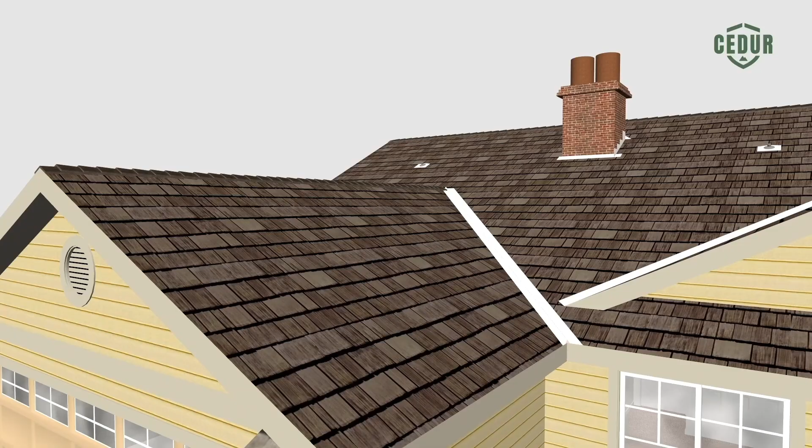Welcome to the CEDUR Synthetic Roofing Products Installation video. In this video, we'll guide you step by step to ensure smooth and professional installation of your CEDUR roof.

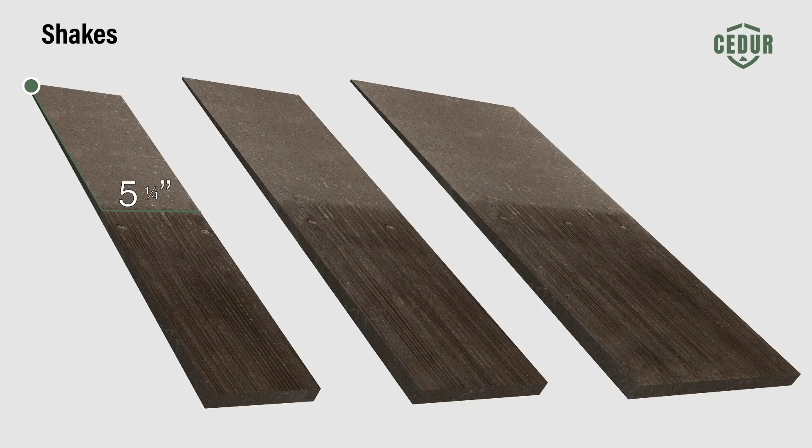Let's get started. CEDUR shakes are manufactured in three widths: 5 1/4 inches, 7 1/4 inches, and 12 1/4 inches. All CEDUR shakes are approximately 23 1/4 inches long. Similar to heavy hand-split natural cedar shakes, CEDUR shakes are 3/4 of an inch thick at the butt end and taper to 1/8 of an inch.

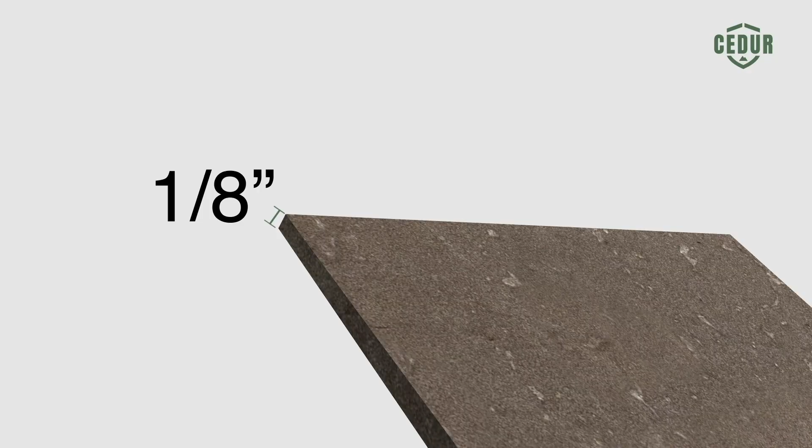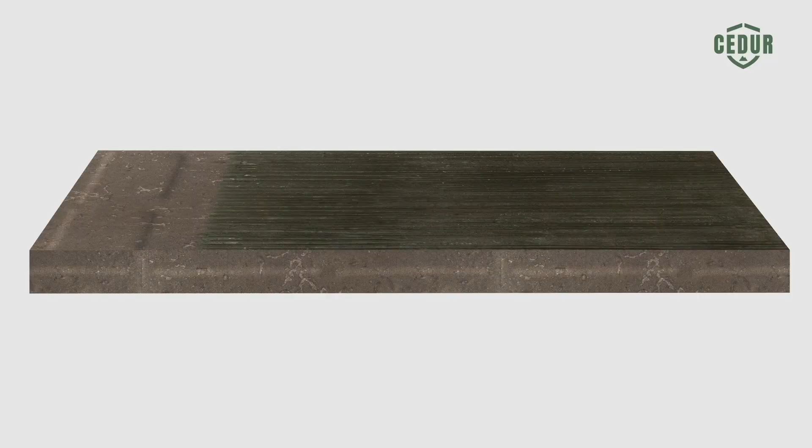CEDUR ridge pieces come in three pitches: low, medium, and high. Ridge pieces are 13 inches long, 3/4 of an inch thick, and cover 10 inches of the roof ridge. CEDUR starter pieces come in one size, measuring 15 inches by 15 inches. They are 3/8 of an inch thick at one end and gradually taper down to 1/8 of an inch at

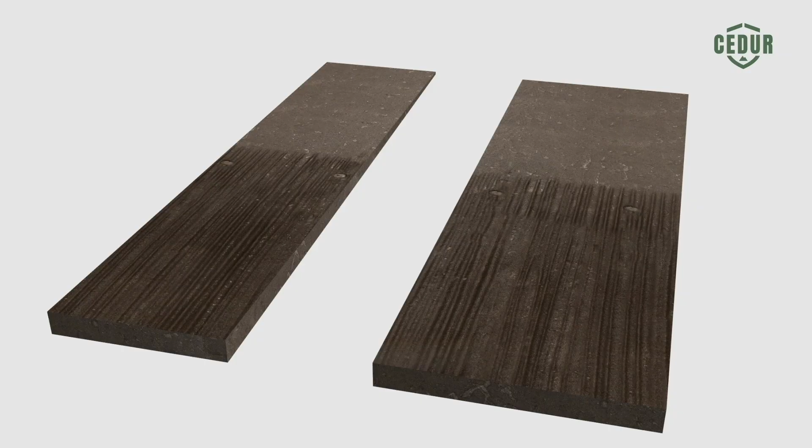the other end. All CEDUR shakes have dimple marks that indicate where fasteners should be placed. The 5 1/4 inch and 7 1/4 inch shakes each have 2 fastener locations, while the 12 1/4 inch shakes have 3 fastener locations. CEDUR starter pieces require 4 fasteners, and CEDUR ridge pieces require 4 fasteners, 2 fasteners per

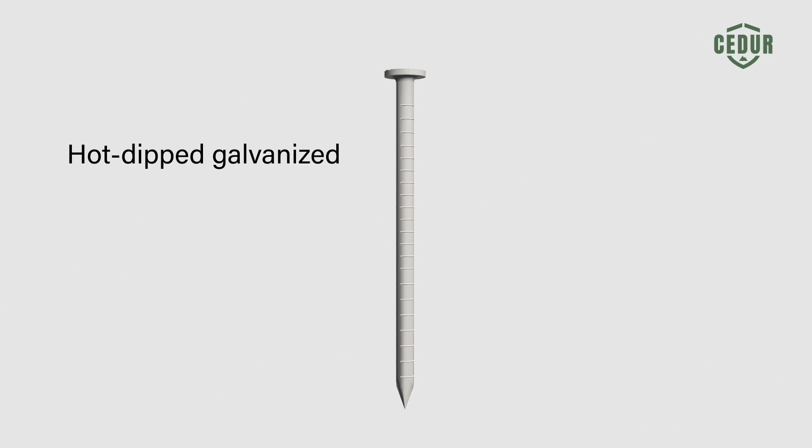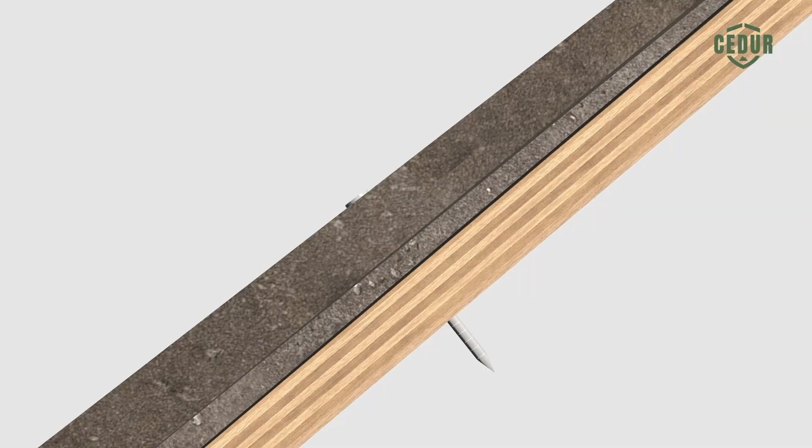side. The recommended fasteners for installation are ring shank roofing nails that are hot-dipped galvanized, 1 3/4 inches in length with an 11 gauge thickness and a 5/16 of an inch head. For ridge fastening, longer fasteners may be required based on various factors. During installation, it's important to drive the fasteners flush to the surface of the product. Be careful not to overdrive or underdrive the fasteners.

Fasteners must penetrate at least 3/4 of an inch into or through the decking to ensure stability. See roof fastener guidelines and printed installation document for more information. Non-compliance to these fastening requirements may void the warranty.

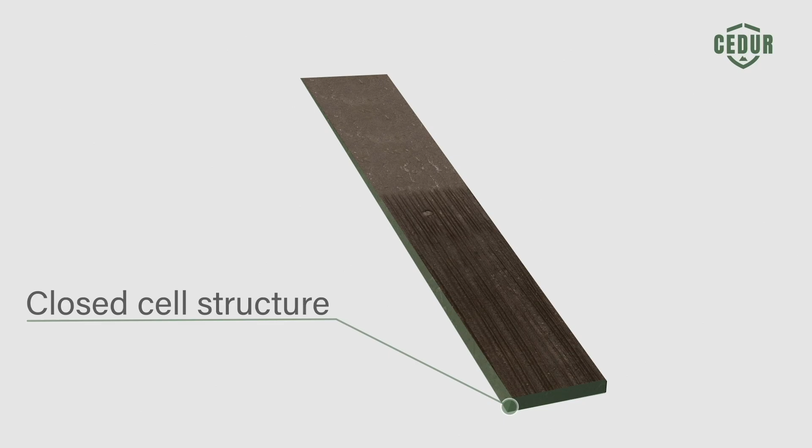CEDUR shakes are solid and colored throughout, providing consistent color stability at cut edges. If cutting is required, shakes can be easily cut and scored using a utility knife or Skilsaw. CEDUR shakes require no sealing or treatment to cut edges due to their closed cell structure, which permits no significant water absorption. To maintain a uniform roof appearance, always place the factory edge on the outside after making cuts. Since CEDUR shakes are resistant to water absorption, they do not require sealing or treatment on cut edges.

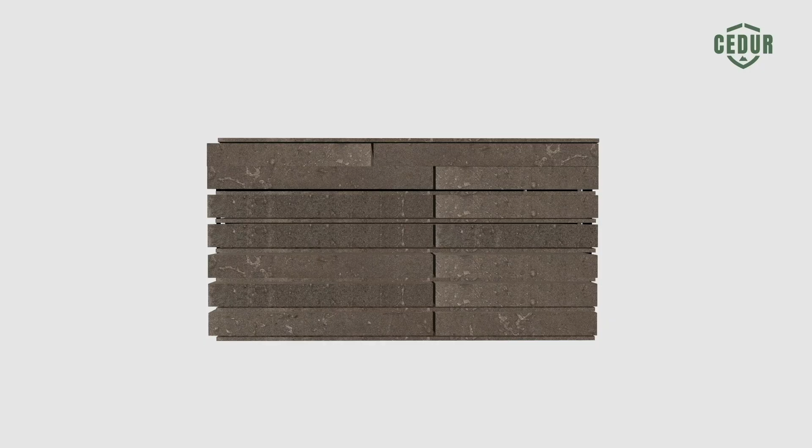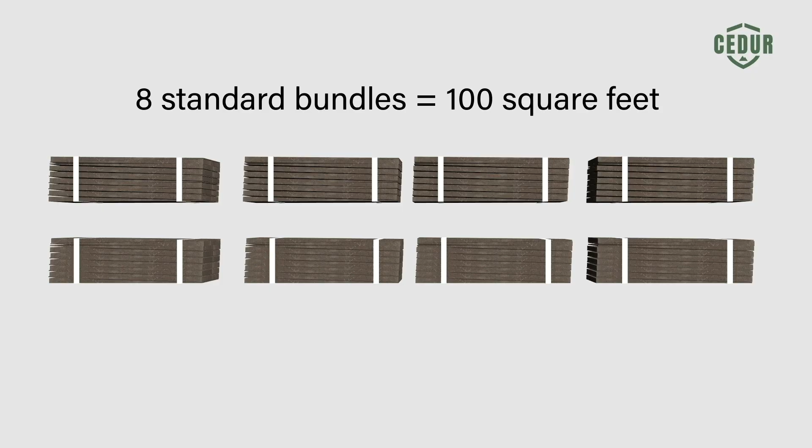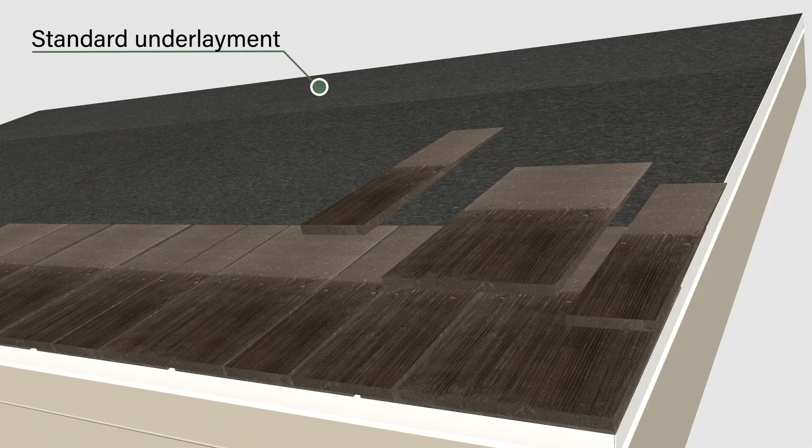Each bundle of CEDUR shakes contains 21 pieces, including 7 pieces of each size. When installed with a standard 10 inch to the weather exposure and a 3/8 of an inch keyway, 8 standard bundles will cover 1 roofing square, which is 100 square feet. CEDUR is a lightweight roofing product, weighing approximately 180 pounds per square. Additionally, no special fire-resistant underlayment is required to achieve a Class A fire-rated roofing system.

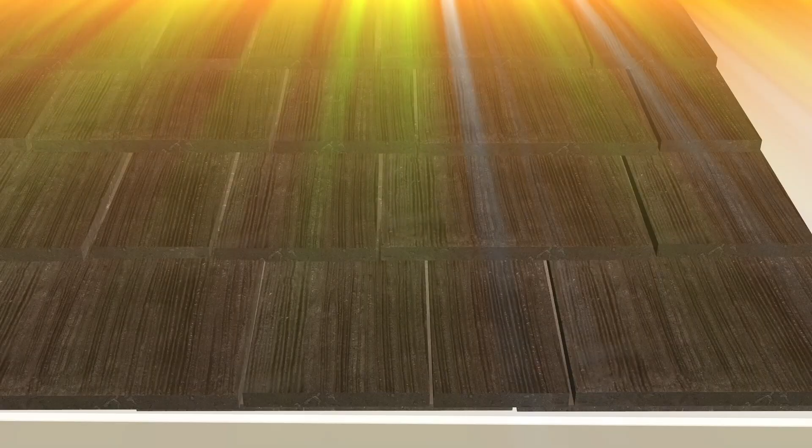It's important to note that CEDUR shakes will, by design, shift color upon exposure to the sun. This color change happens gradually over the first 90 days after installation. Once this period is complete, the color stabilizes to a weathered wood color for the life of the product.

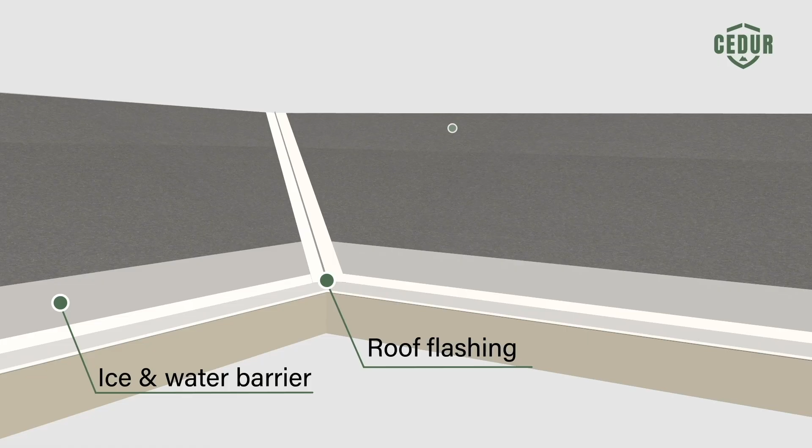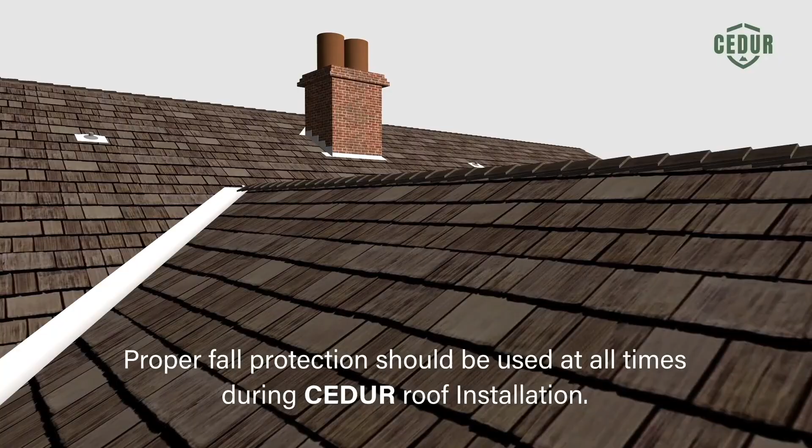Before installing CEDUR shakes, all roof flashing, ice and water barrier, and underlayment must be properly installed. During roof installation, take the necessary safety precautions to ensure optimal worker safety. This includes protective equipment, toe boards, tie-off, and abiding by local building codes. Please verify compliance with local building codes, applicable regulations, and best industry practices.

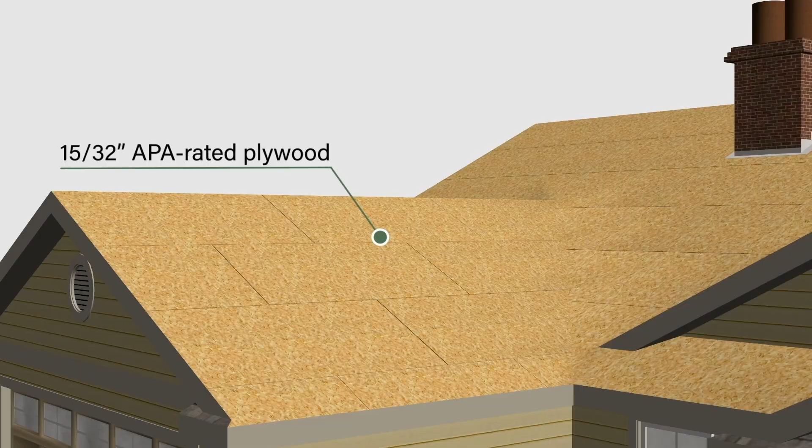CEDUR roofing products must be installed on a solid roof deck with a minimum slope of 4:12. Anything under 4:12 is considered decorative. Please consult CEDUR for proper installation recommendations. Install CEDUR shakes on solid decking consisting of either code-complying 15/32 of an inch thick American Plywood Association rated plywood, APA rated wood panels, or other building materials that meet these minimum requirements in accordance with DOC PS1.

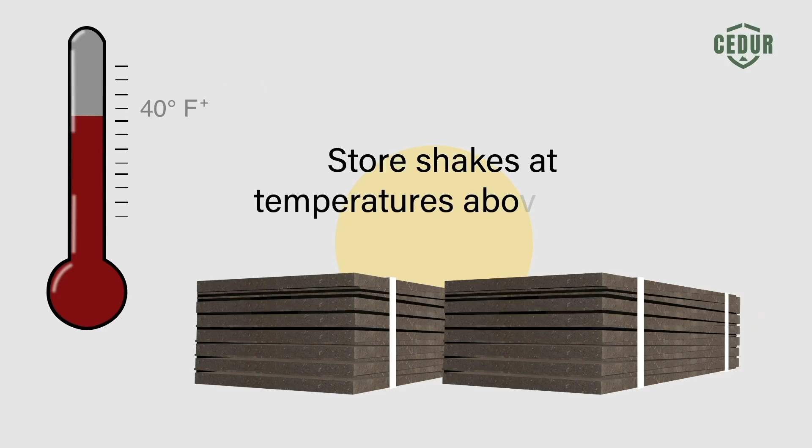CEDUR shakes should be stored at temperatures above 40 degrees Fahrenheit and should not be installed when temperatures are below 20 degrees Fahrenheit. When storing CEDUR pallets, do not stack them more than 2 pallets high.

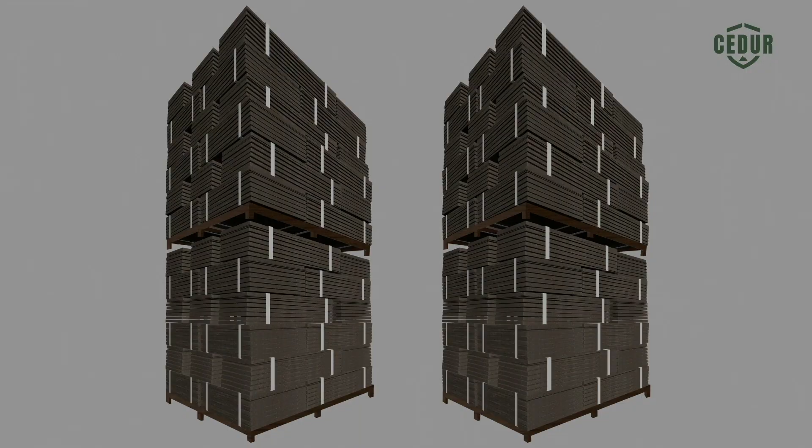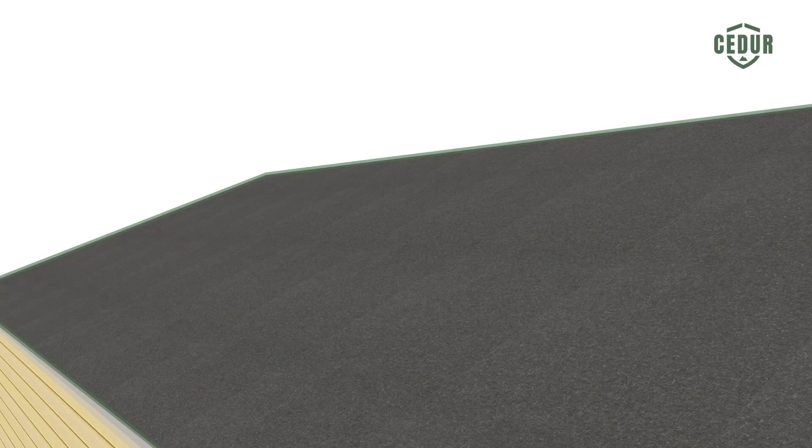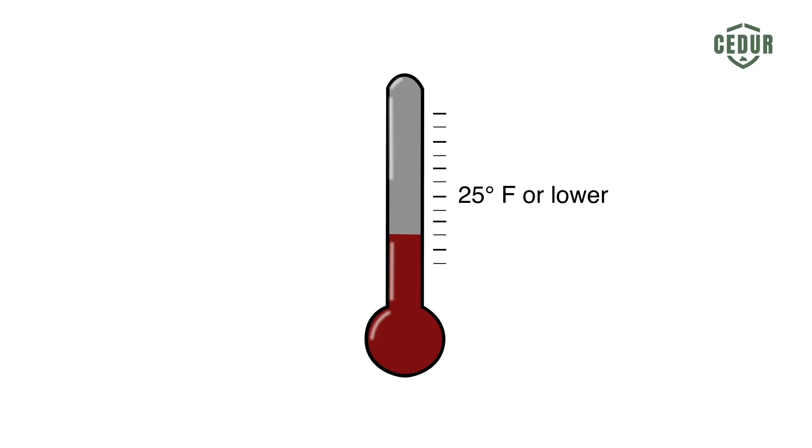Underlayment and course installation. For roof pitches of 4:12 and above, the entire roof deck must be covered with one layer of water-resistant roofing underlayment conforming to ASTM D226. In areas where the average daily temperature in January is 25 degrees Fahrenheit or lower, install an ice and water barrier that consists of a self-adhering polymer-modified bitumen sheet in lieu of normal underlayment at the eaves.

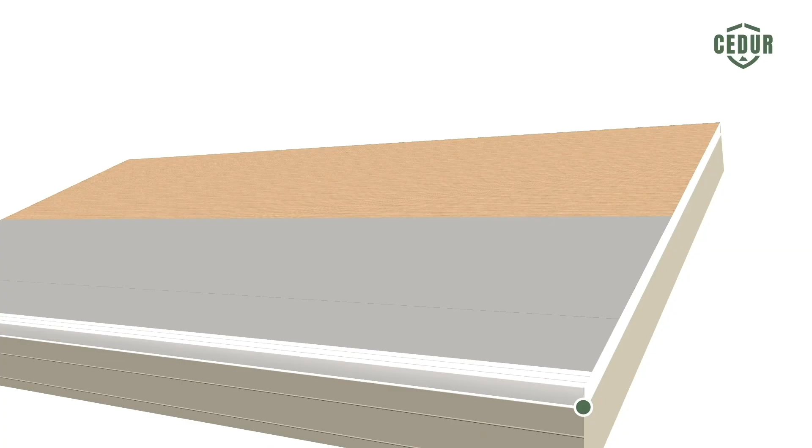Extend ice protection underlayment from the eaves edge to a point at least 24 inches inside the exterior wall line of the building. Chalk lines should be snapped on the underlayment with the tips of the shakes following the lines.

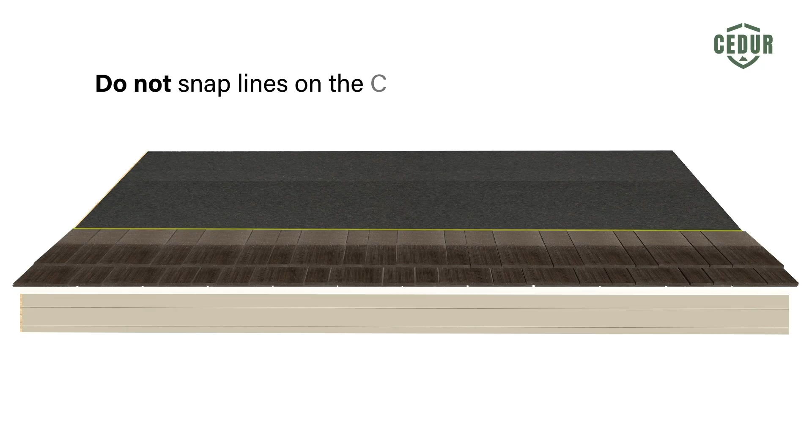Do not snap lines on the Cedur shakes or use red chalk, as the chalk may permanently discolor the shakes. For roof pitches between 4 and 12 and 6 and 12, in addition to one of the base sheet options mentioned, install one layer of ASTM D226 Type 2 36-inch number 30 underlayment at the eave line.

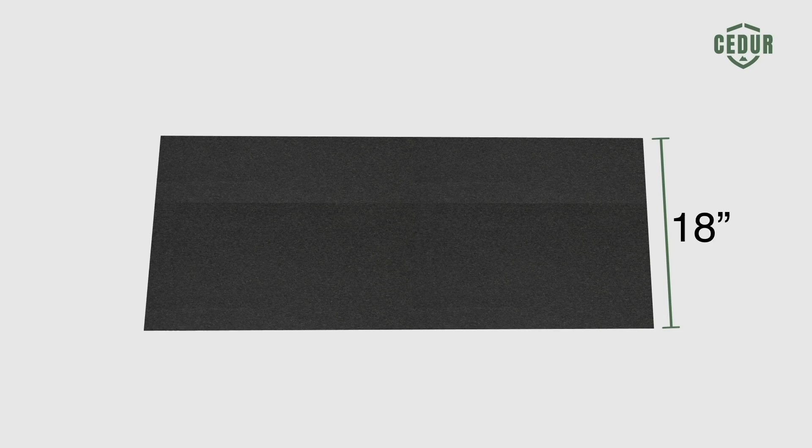After applying the starter shakes, a minimum 18-inch wide strip of interlay of ASTM D226 Type 2 or ASTM D4869 number 30 shall be laid over the top portion of the starter shakes, the butt end of the interlay course extending upslope onto the sheathing, or dry in approximately 9 inches above the fascia, allowing for a 1-inch overhang.

After installing the field shakes over the starter shakes, position the bottom edge of the next interlay on the 10-inch line of the interlay previously installed. Continue laying each course along the 10-inch line, or closer if the roof layout requires less than a 10-inch exposure.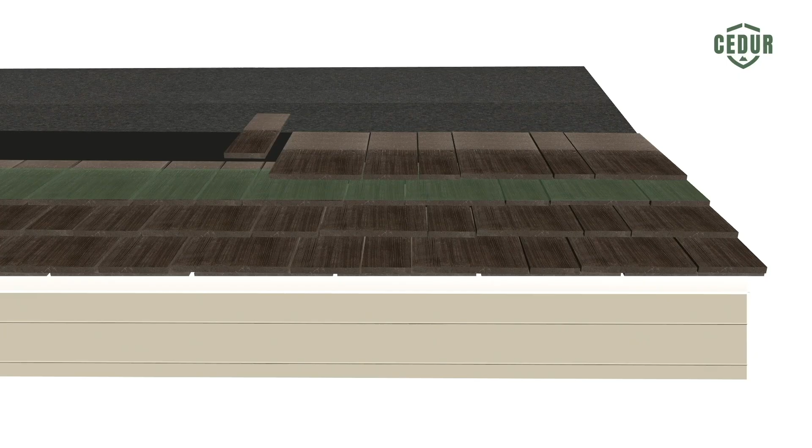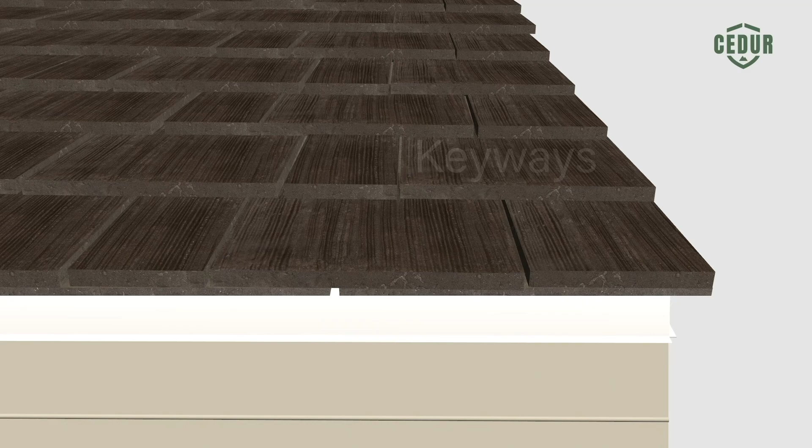Felt interlayment on the cedar shakes is to be installed so it does not extend below a line that is twice the exposure above the butt. For example, 23¼ inch shakes at 10-inch exposure would have felt applied 20 inches above the butt. No felt should be visible between the side joints of the shakes, also known as keyways. Additionally, no fasteners or shiners should be visible between keyways or after the roof is fully installed.

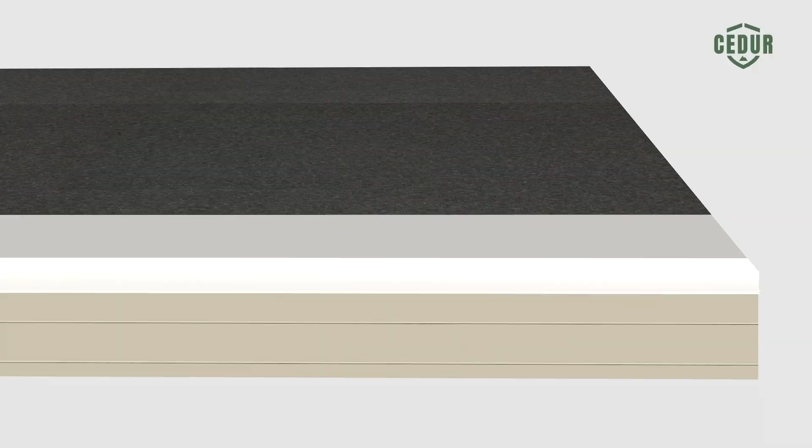Starter installation. Once the roofing underlayment is properly installed, begin the cedar roof installation by laying a course of the tapered cedar starter pieces, which measure 15 inches by 15 inches. Cedar starter shakes should be installed along all roof eave lines. Installation can begin at the center of the roof or from either side.

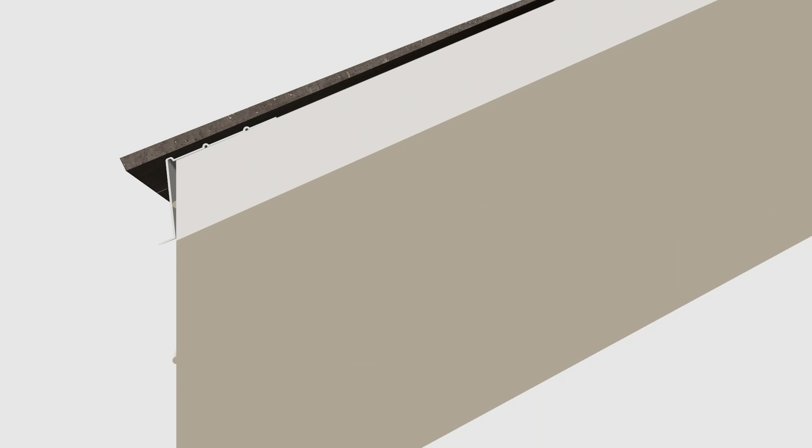Starter should provide 3/4 inch to 1 inch overhang at the eave edge. Where gutters are present, adjust the overhang as needed to ensure proper water flow into the gutters. The butts of the starter shakes and the first course of cedar shakes should project equally beyond the finished fascia. This ensures proper water drainage and should be adjusted based on site conditions.

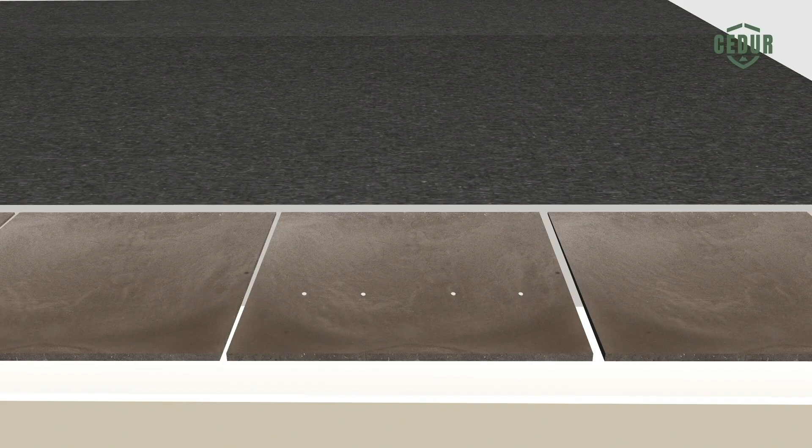For proper horizontal alignment, snap a chalk line as a guide when placing the entire starter course. Secure each starter piece with 4 corrosion-resistant fasteners. These fasteners must be long enough to fully penetrate a minimum of 3/4 inch into the decking. The recommended fasteners are 1 3/4 inch hot-dipped galvanized ring shank roofing nails with an 11-gauge thickness and a 5/16 inch head. If cedar starter pieces need to be cut, use a Skilsaw or utility knife.

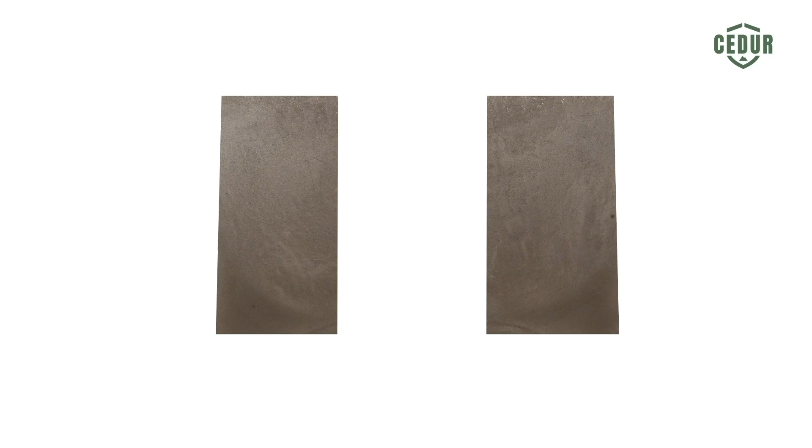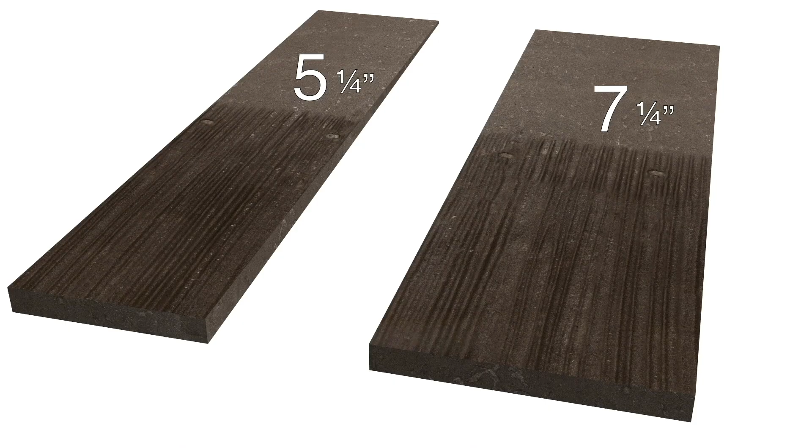Shake course installation. Now let's install the first course of cedar shakes, beginning on top of the cedar starter pieces. Cedar shakes are approximately 23¼ inches long and are manufactured in 3 widths. Each shake has dimple marks that indicate where the fasteners must be placed. The 5¼ inch and 7¼ inch shakes each have 2 fastener locations, while the 12¼ inch shakes have 3 fastener locations. Fasteners should be placed at, or as near as possible to, the fastener dimple marks to avoid improper installation.

Fasten the cedar shakes over the starter pieces using the recommended fasteners. These fasteners must penetrate at least 3/4 inch into or through the decking. When installing the shakes, use a combination of different widths to ensure that side laps are no less than 1 1/2 inches. This can be done by alternating between the 5¼ inch, 7¼ inch, and 12¼ inch shakes in a randomized pattern. The minimum standard keyway is 1/4 inch and the maximum standard keyway is 3/8 inch.

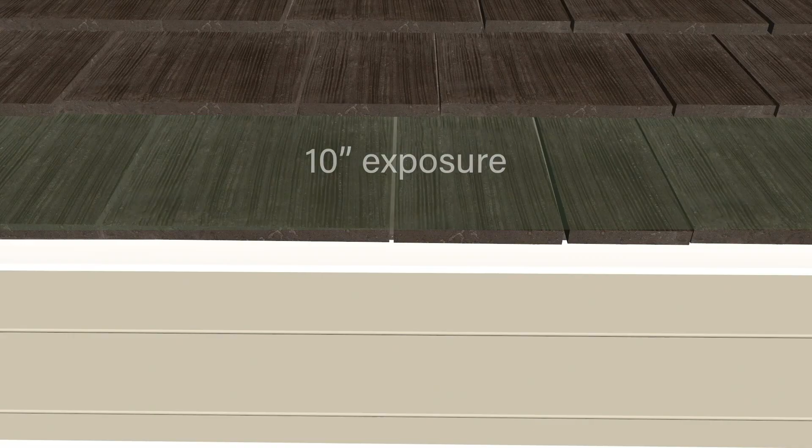A 10-inch weather exposure for straight line installations is standard and has been used for all calculations, testing, and certifications. The number of cedar shakes per square is based on a 3/8 inch keyway. For a 1-inch staggered installation, most shakes are laid with a 9-inch exposure, while random shakes are laid with a 10-inch exposure to create the 1-inch stagger. The maximum recommended stagger is 2 inches, with an 8-inch exposure.

When installing in a staggered manner, the first course directly above the starter should be straight to align with the starter along all roof eaves. Then the remaining courses above the first course can be staggered. It's important to note that more cedar roofing material will be required for a staggered installation.

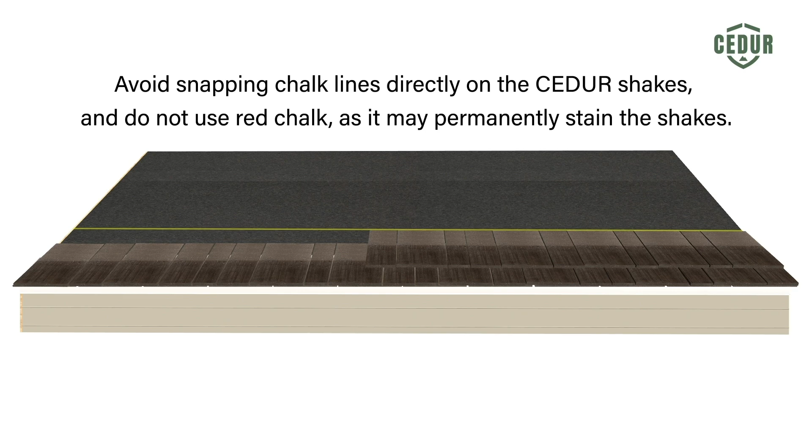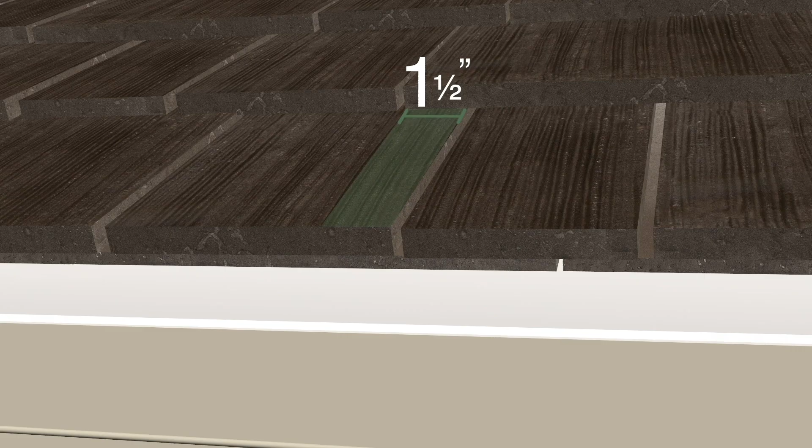To maintain proper horizontal alignment, snap chalk lines frequently on the underlayment and ensure that the tips of the shakes follow the lines. Avoid snapping chalk lines directly on the CEDUR shakes, and do not use red chalk as it may permanently stain the shakes. To maintain proper spacing, offset joints between courses a minimum of 1 1/2 inches. There's no set order when installing cedar shakes, but it is critical for roof performance and longevity that keyways do not line up from course to course.

No fasteners or shiners should be visible between keyways or in exposed areas when the cedar roof installation is complete. After completing the first course, pay attention to course alignment for the following courses. When tabbing down or making repairs, use the CEDUR recommended adhesives, which are comprised of 100% silicone.

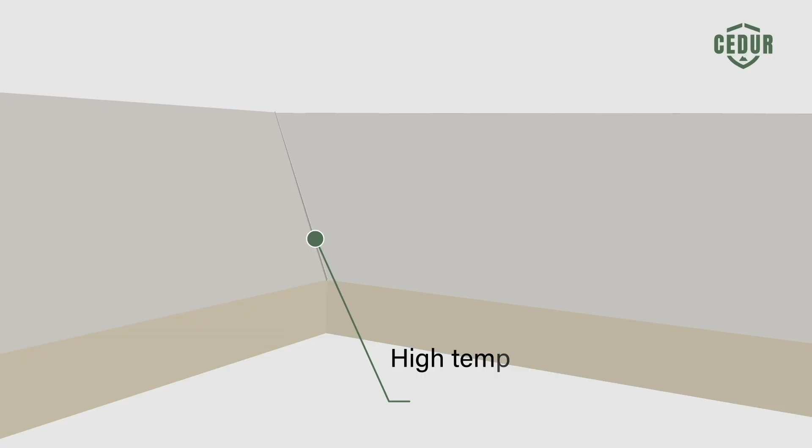Valley and rake edges installation. At the roof valleys, install a high-temperature ice and water barrier that consists of a self-adhering polymer-modified bitumen sheet in lieu of normal underlayment. This is to be installed in the valley prior to valley metal installation, according to local building code and best practices.

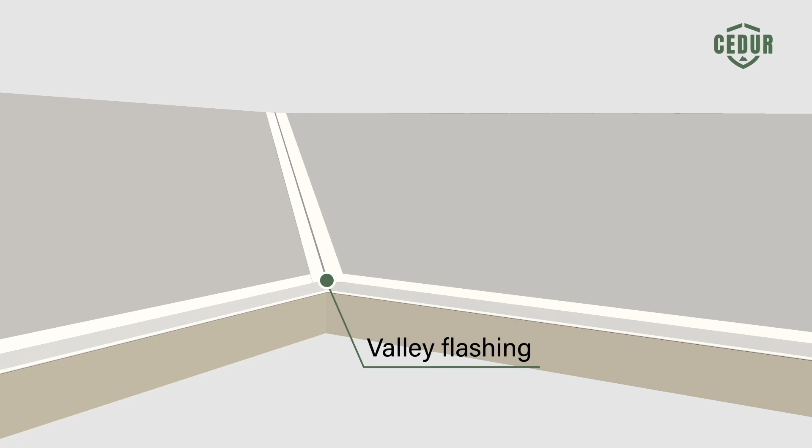Valley flashing should extend 11 inches from the center line each way for slopes of 3/12 and greater, and 14 inches for slopes less than 3/12. Both closed and open valleys are acceptable for installation, and it's required to use no less than 26-gauge corrosion-resistant metal flashing. Extend cedar shakes at least 4 inches over the valley metal flashing, and do not place fasteners within 5 inches of the flashing centerline.

To avoid placing fasteners within 5 inches of the centerline, it's okay to position fasteners above the dimple mark locations and seal shakes with silicone adhesive. Remember, fasteners should never be placed in exposed areas, as they shouldn't be visible once the roof installation is complete. When working in valleys, make sure cuts are straight and even to ensure a clean, uniform installation.

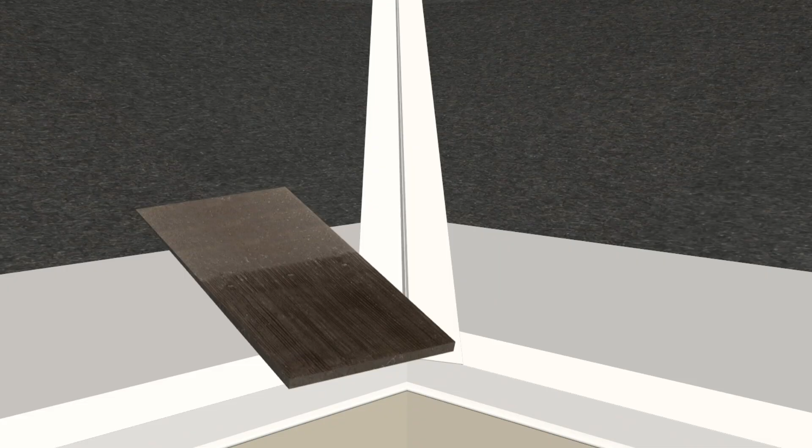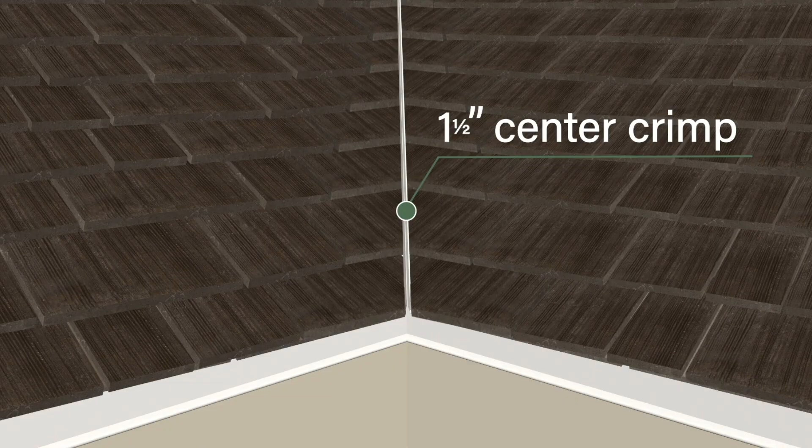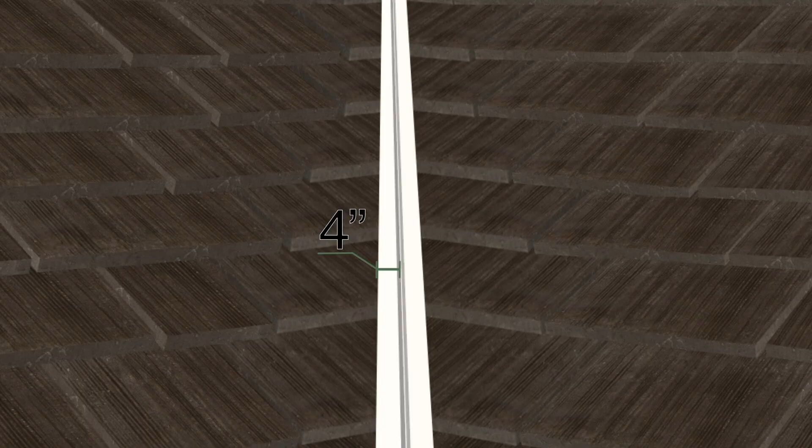To avoid using small cut pieces near the valley, use larger shake pieces closer to the valley line. Keep in mind that 12 1/4 inch valley bundles are available for this purpose. For closed valleys, a W-valley metal flashing may be used with a 1 1/2 inch center crimp. In this case, cut the shakes flush to the center crimp for a clean finish. For open valleys, a W-valley flashing may be used with a 1-inch center crimp. Leave at least a 4-inch opening at the top of the valley to allow for proper drainage.

Cedar shakes are solid and uniformly colored throughout, ensuring long-lasting color stability. They can be cut and scored easily using a utility knife or a skill saw. Because of their closed cell structure, cedar shakes do not require sealing or treatment on cut edges, as they prevent significant water absorption. A D-style flashing can be used for aesthetic purposes or to conceal the product. For all gable ends and rakes, extend cedar shakes approximately 3/4 inch over gable and rake ends.

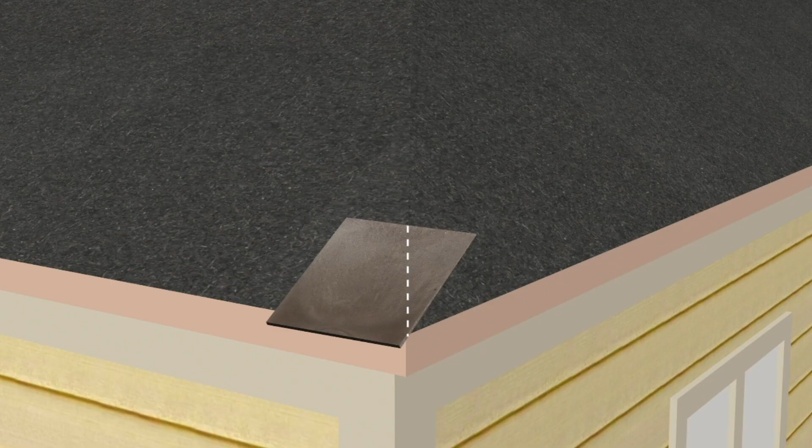Hip and ridge installation. At roof hips, mark and trim the CEDUR starter pieces along the roof eave lines, ensuring a straight cut before installation. Pre-mark and cut shakes prior to installation, and vary the layout by using 5 1/4 inch, 7 1/4 inch, and 12 1/4 inch shakes. To avoid using small cut pieces at the hip, use larger shakes or request 12 1/4 inch valley bundles directly from CEDUR.

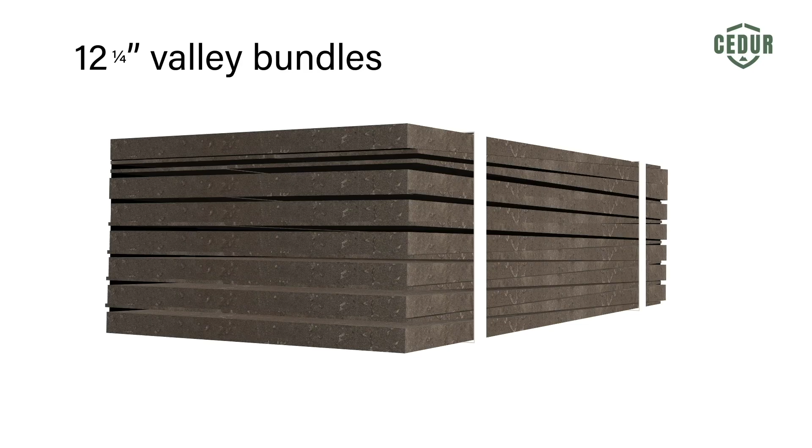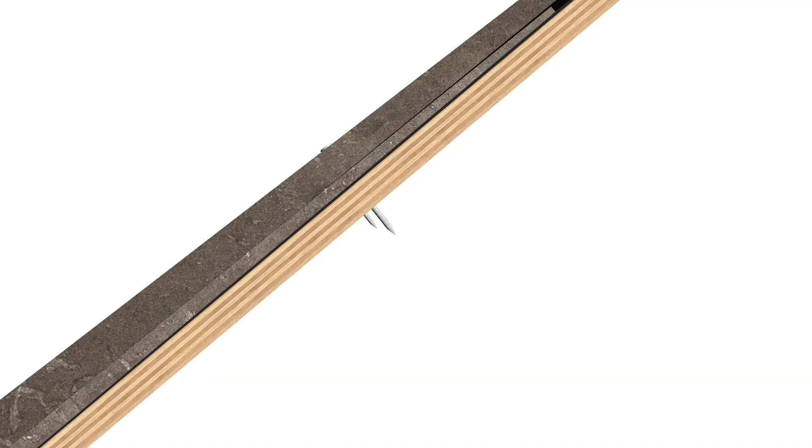At roof hips, if CEDUR pieces are cut, the recommended fasteners may need to be placed outside the marked fastener locations. Drive the fasteners flush with the surface of the product. Be sure not to overdrive or underdrive them. Vary the shake selection and randomize between the 5 1/4 inch, 7 1/4 inch, and 12 1/4 inch shakes to create a natural look. Continue trimming and installing CEDUR shakes up the hip in a continuous line. Provide a minimum of 3/8 inch spacing across the center line of the hip and at unvented ridges.

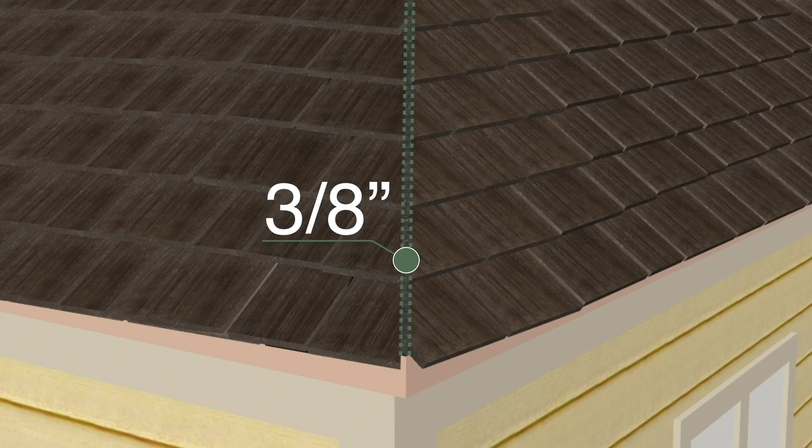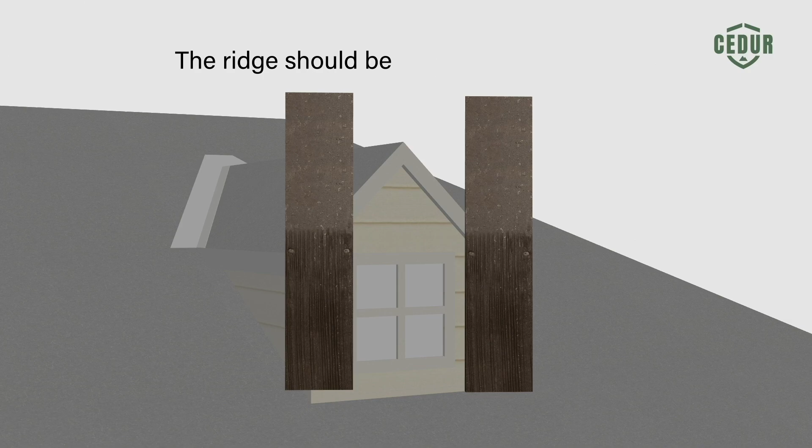Use low-slope ridge caps for ridge slopes between 4/12 and 7/12. Use medium-slope ridge caps for ridge slopes between 8/12 and 11/12. Use high-slope ridge caps for ridge slopes between 12/12 and 14/12. For slopes above 14/12 up to 21/12, the ridge should be field assembled using 5 1/4 inch wide CEDUR field shake pieces. Install one layer of code-compliant underlayment and lap the roof underlayment over the hips and under the ridge pieces.

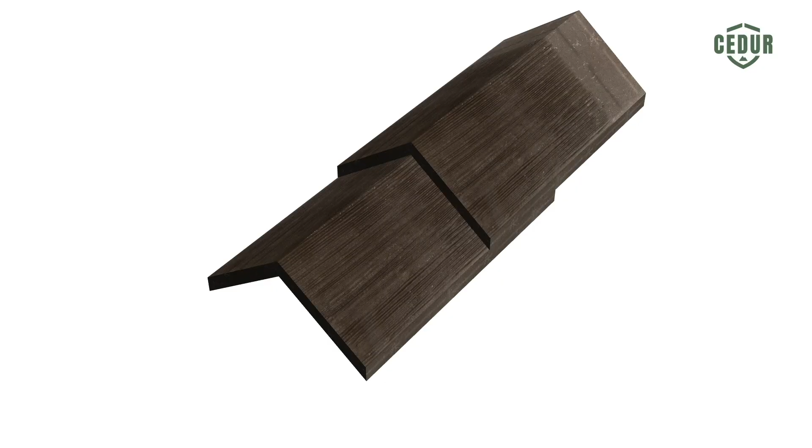Each hip and ridge piece requires 4 fasteners, 2 per side. Fasteners should be concealed by the overlapping piece, and they must penetrate through the deck or at least 3/4 of an inch into the deck. Longer fasteners may be required at hips and ridges to ensure adequate roof deck penetration. Ensure that no fasteners are exposed on the hip and ridge caps or on the field shakes.

Where the hip caps meet at the ridge, dry fit, mark, cut, and score the CEDUR ridge to create a miter joint. At transitions, avoid exposed fasteners and apply a color-matched silicone-based sealant. Begin installing ridge caps at the gable ends. Double the preformed hip and ridge course at the start of each hip. Where the ridge meets the roof slope, miter and seal the fasteners with a color-matched 100% silicone-based sealant. Roofing snow brackets are optional above walkway areas, but should be considered in mountain regions and areas with heavy snow loads. Custom flashing can also be used at transitions to achieve a desired appearance.

Flashing details. Chimney and penetration flashing dimensions may vary depending on the chimney size, location, local building codes, roof size, and other factors. Before starting, verify code compliance and follow regional industry best practices. Windows, caps, and all other projections at points where rainwater accumulates are to be protected with metal flashing.

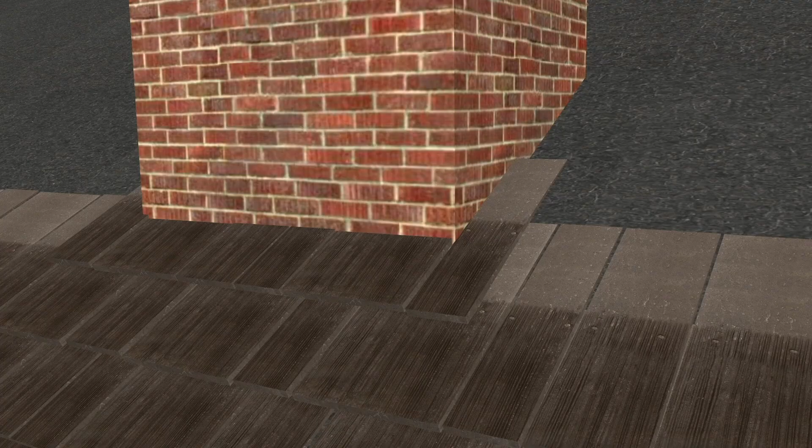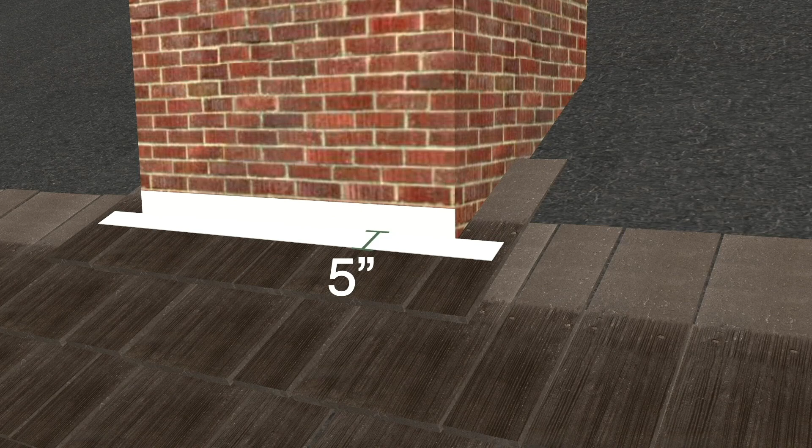For chimneys and rectangular penetrations, install shakes up to the base of the chimney, then place apron flashing over the shakes. The apron flashing should extend at least 6 inches past the chimney, rise a minimum of 5 inches up the chimney wall and extend at least 5 inches onto the shakes. The return leg should extend a minimum of 3 inches along the chimney sidewall.

Next, install step flashing, overlapping the apron flashing by at least 3 inches. Step flashing should extend a minimum of 5 inches onto the sidewall shakes. When chimneys, curbs, skylights, or any vertical protrusion through the roof are at least 30 inches wide, saddles or crickets are required. In areas with adverse weather conditions, use extended metal flashing lengths and a 36-inch wide layer of pressure-sensitive, polymer-modified bitumen flashing strip in sheet are required. These flashings are to extend not less than 10 inches under the shakes.

Step flashing must be used where vertical surfaces occur in connection with slopes. Flashing is to be formed of separate pieces installed with each course of shakes and lap no less than 3 inches. Install a course of shakes over the step flashing. Place the next step flashing over the installed shake, ensuring that each piece laps the previous step flashing by at least 2 inches. For openings more than 30 inches wide, install cricket flashing.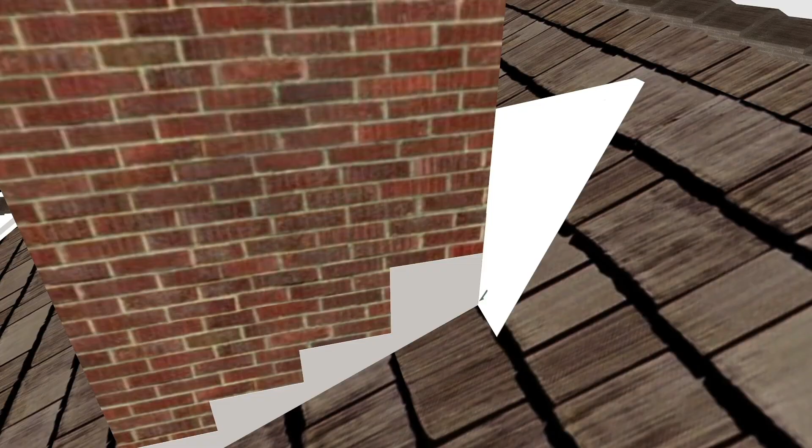Lap the cricket flashing a minimum of 3 inches over the step flashing. The vertical leg of the cricket flashing should extend at least 3 inches above the apex. Complete the shake installation by extending the upper end of the cricket flashing at least 6 inches beyond the first course of shakes. Pan flashing may also be used as an alternative to step flashing.

Install pan flashing on the sides of the chimney, lapping a minimum of 3 inches onto the apron flashing. Extend the pan flashing at least 5 inches over the sidewall shakes. To prevent water intrusion, verify that all flashing and counter flashing is properly installed. This flashing should extend at least 14 inches up the slope of the roof.

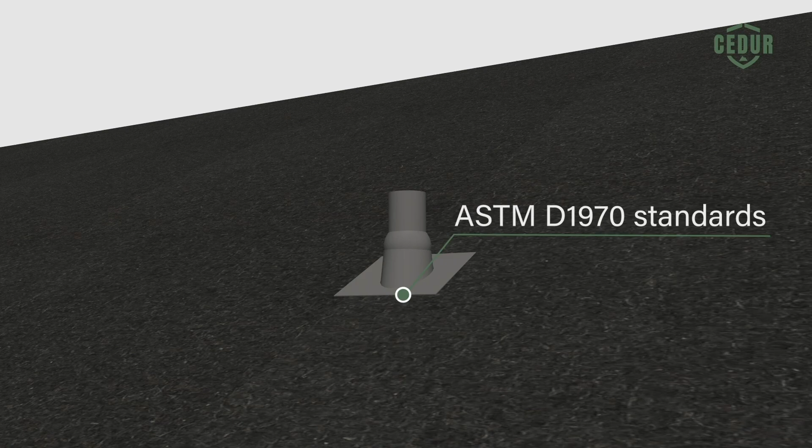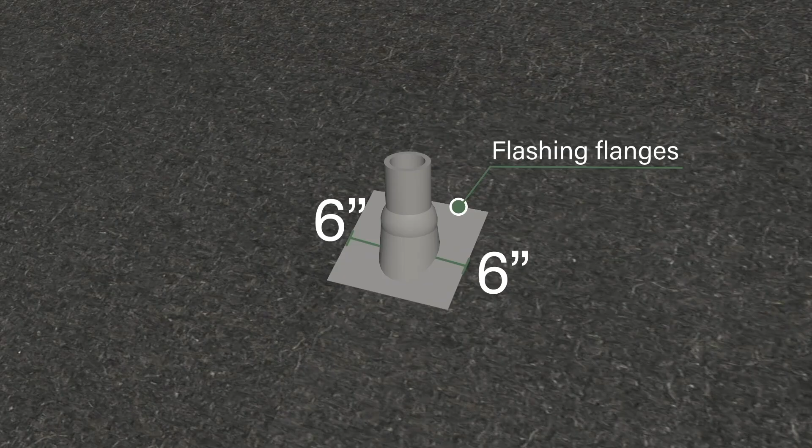For pipe penetrations, install self-adhered deck flashing that meets ASTM D1970 standards. All pipes projecting through the roofs must have a deck flashing and be waterproofed appropriately. The flashing flanges are to extend out on the roof not less than 6 inches. The flashing flanges are to be of sufficient length to cover the shakes course below the pipe and extend up under the butt of the course above as far as possible without being punctured by fasteners.

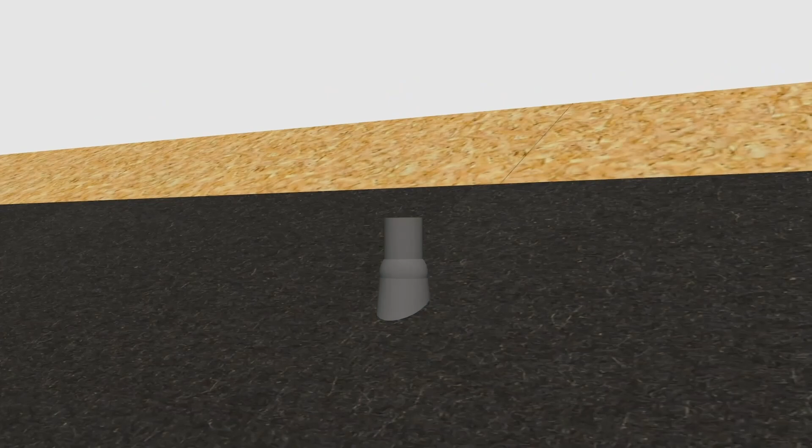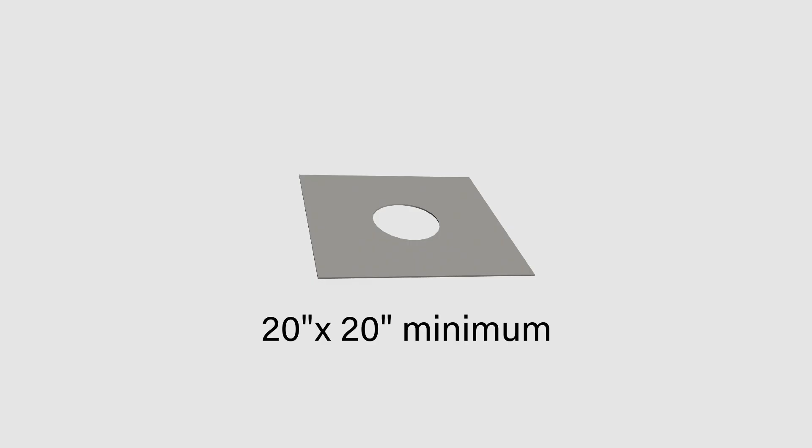Maintain a 1-inch shake clearance around the pipe projection. Install underlayment that extends a minimum of 10 inches past the penetration. Install a 1-piece pipe boot or a malleable metal flashing sleeve over the pipe. Using a minimum 20-inch by 20-inch deck flashing that meets or exceeds ASTM D1970, cut the flashing to fit over the pipe. The flashing flanges are to extend a minimum of 6 inches from the pipe.

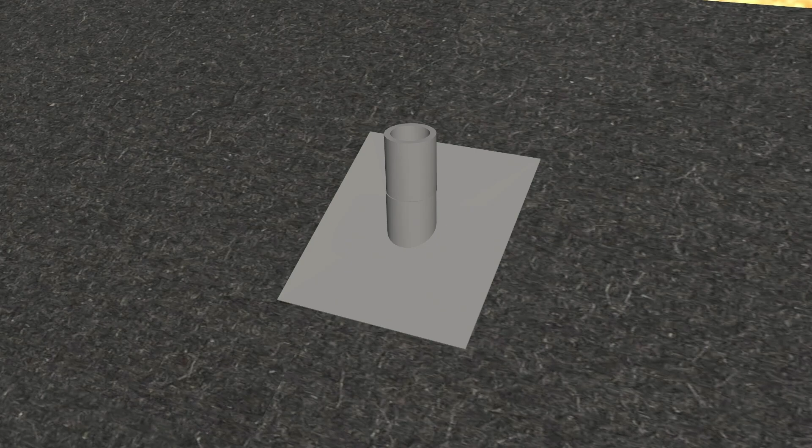Roofing cement can be used to seal transitions for added protection. Install shake courses in the usual manner below the penetration. Then, install the next course and cut a shake to fit over the opening. Install the cut shake and continue the roof installation.

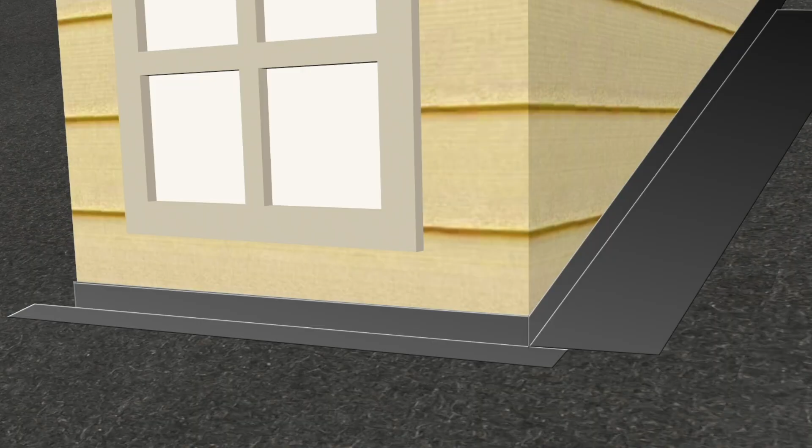A moisture-resistant barrier must be installed between galvanized flashing and vertical surfaces. Flashing should extend no less than 10 inches under the shakes to provide adequate protection. Around rectangular penetrations, deck flashing should be turned up a minimum of 4 inches. Step flashing should extend no less than 5 inches under the shakes and no less than 5 inches up the vertical surface where the shakes meet. Dormer flashing shall run up not less than 6 inches under the shakes and a minimum of 5 inches up the vertical surface. Complete the installation by installing the remaining shake courses.